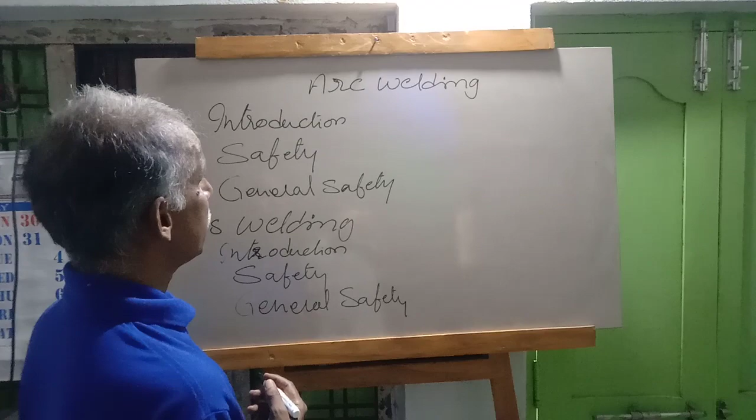In the previous class, we were learning about rivet joints. Rivet joint is a permanent fastener, and arc welding also is a permanent fastener.

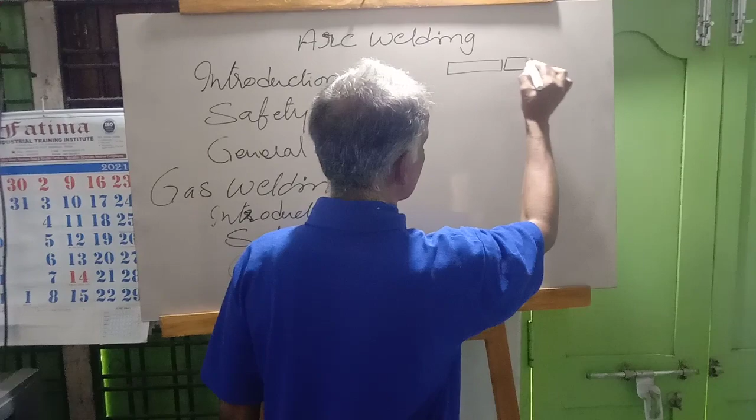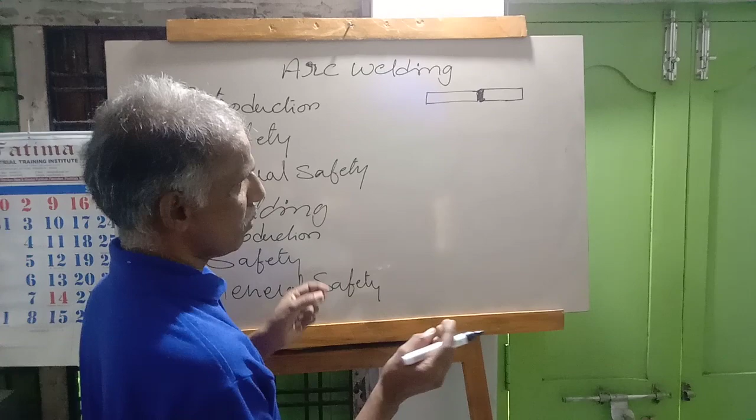Arc welding is a permanent fastener which will join two metal strips by welding, which will melt the two edges of the metal, and the parent metal will fill in these gaps. So to join two or more different parts, different flats, or any iron metal together is called welding. It is a permanent fastener.

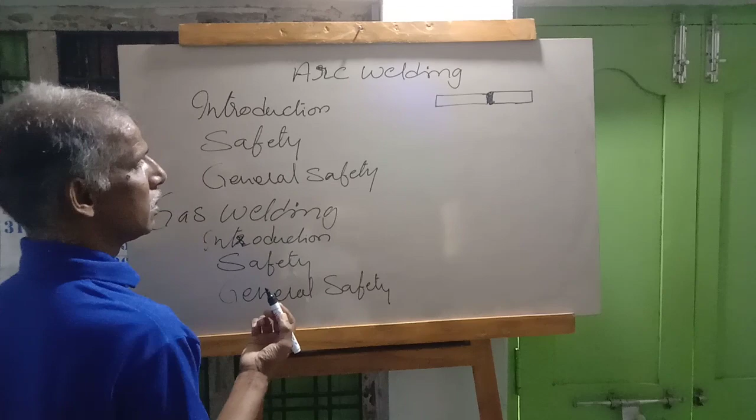Arc welding can be done on metals like mild steel, stainless steel, and cast iron. There are different methods we use for welding to join two different parts. That is the introduction of arc welding.

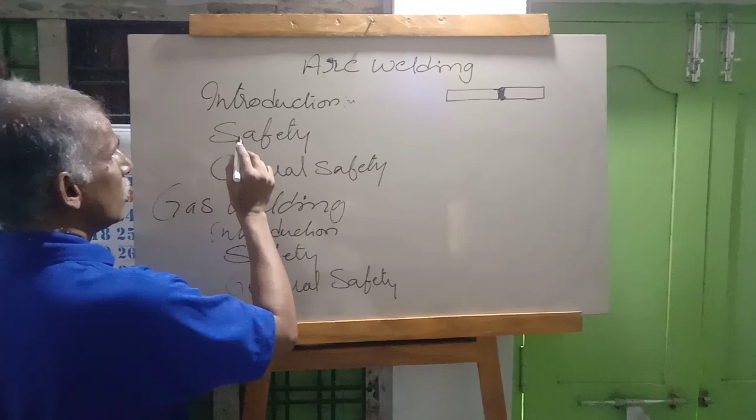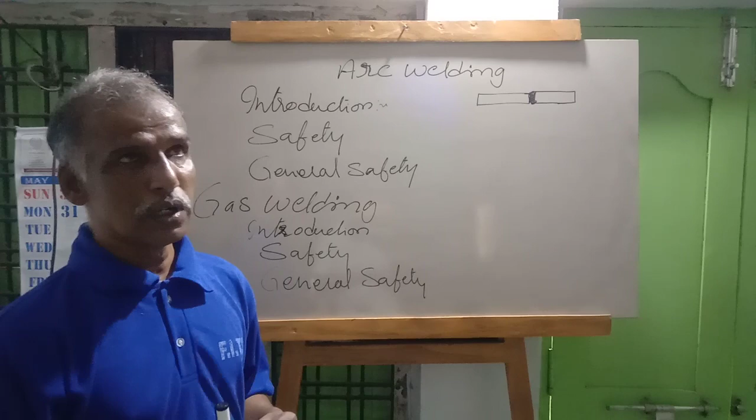When doing arc welding, we have to follow some safety precautions, because the arc produced by the electrode is dangerous to our eyes, as it emits ultraviolet rays. These ultraviolet rays enter into our eyes and will damage your retina.

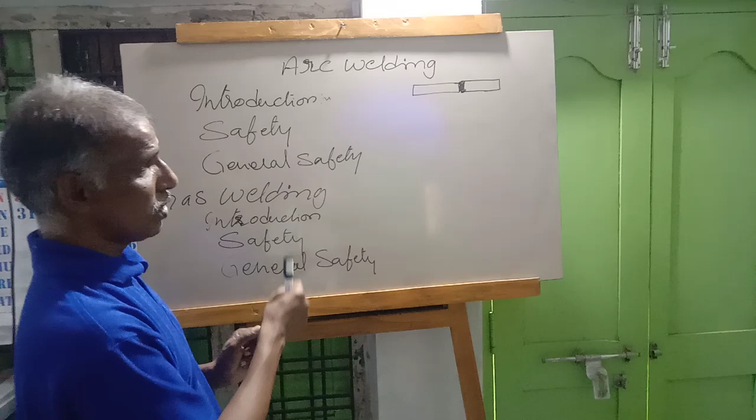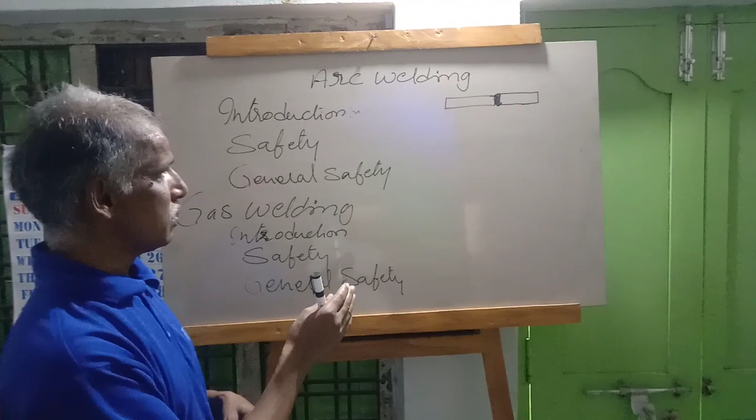So to not allow the ultraviolet rays to enter the eyes directly, while at the same time we need to see where the welding is being done, the welding has to be done perfectly in a systematic way. We definitely have to see, but at the same time the light should not pass to your eyes. So between the ultraviolet rays and our eyes, we use filter glasses which avoid the ultraviolet rays falling on your retina directly.

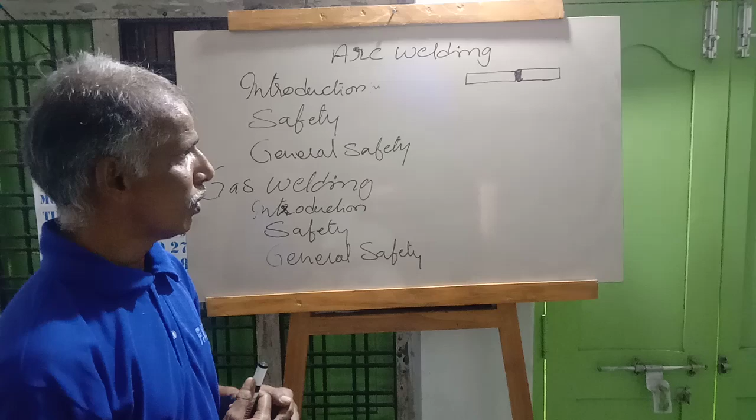This is the first safety precaution we have to follow when we are doing arc welding.

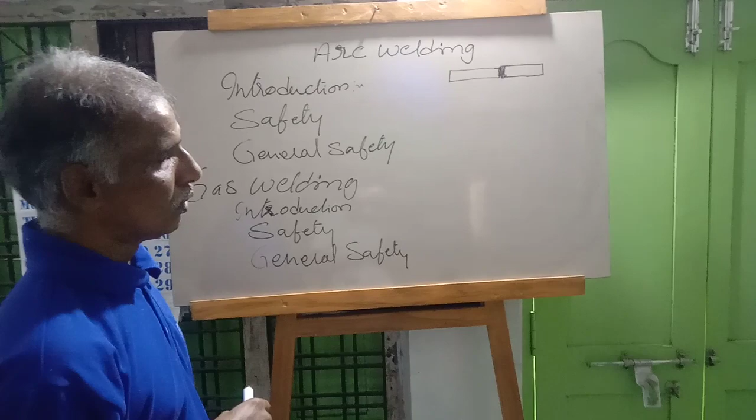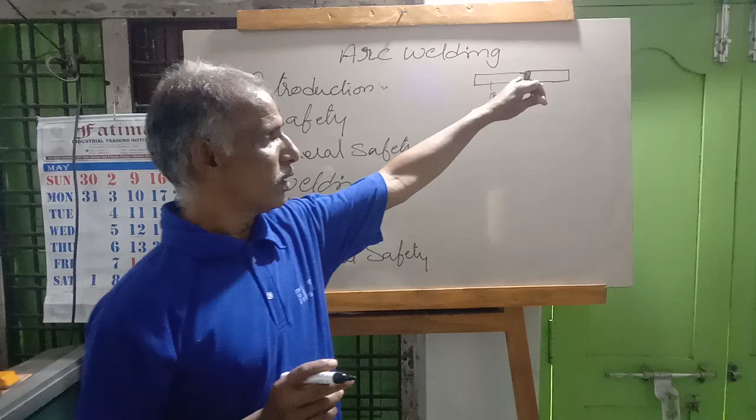Now next, when arc welding is done with the electrode, the place where we are welding, the metal will melt. Generally iron metal melts at 1800 degrees centigrade, but when this iron is melting where we are doing welding, it will have a higher temperature, more than 2400 to 3000 degrees centigrade. When this metal is melting, the metal will oxidize.

At the same time, when we are doing welding, the oxidized metal has to be removed to get good, perfect welding.

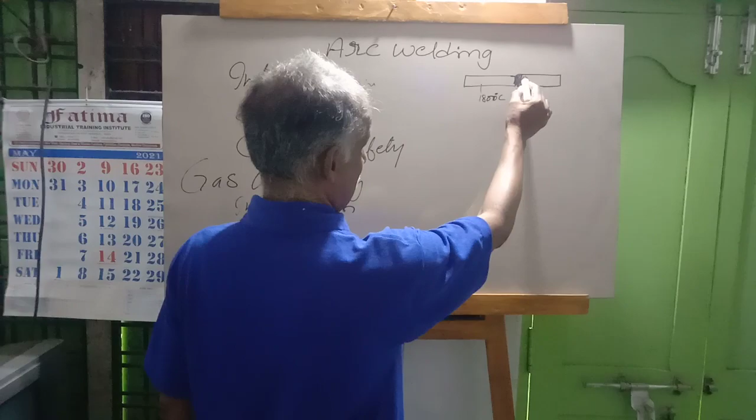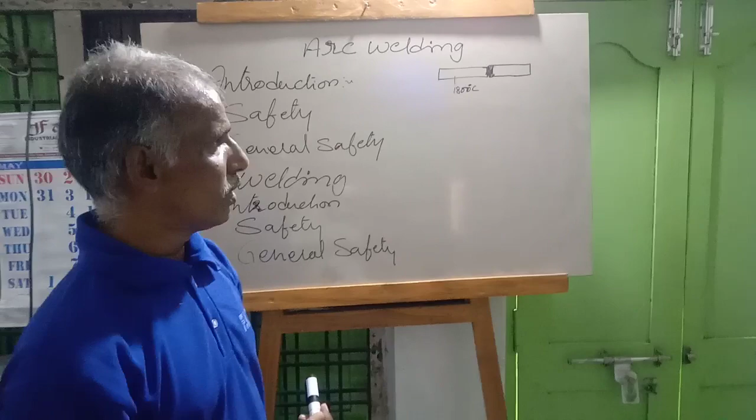When we are doing welding, the electrode has a chemical coating on the wire, and this coating melts along with the welding when it is in the molten state. This chemical will produce more temperature, increasing the heat to melt the metal.

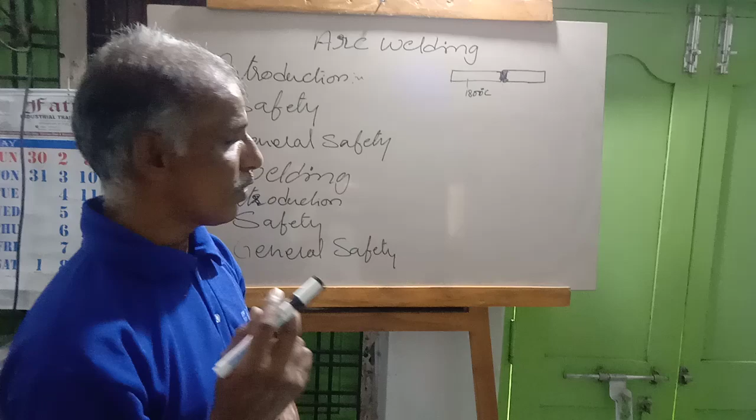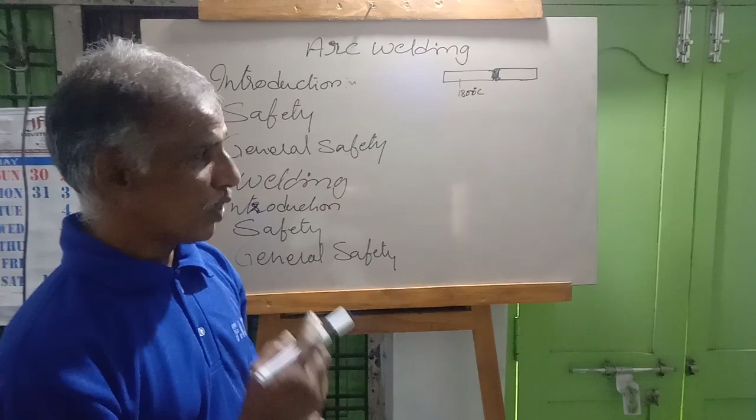At the same time, the chemical burned by this metal melting point produces fumes, and these are hazardous fumes that will affect your eyes. Also, the oxidized metal will expand into the atmosphere, and when you are breathing, it will affect your body.

So the first main safety precaution is that you have to use filter glasses.

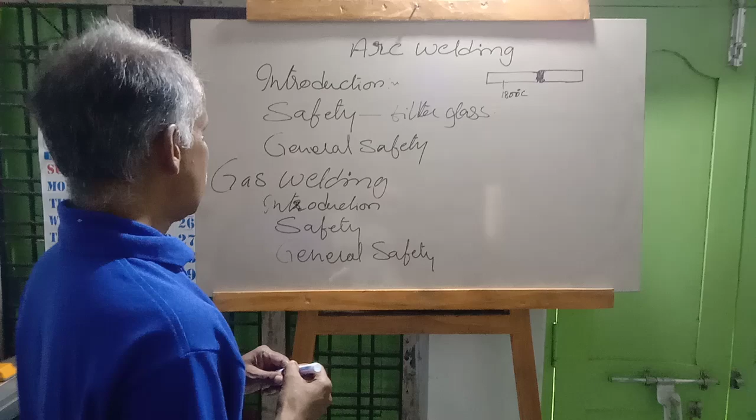Now for general safety when doing arc welding, when you are using the welding machine, the connection from the board to the welding machine should be a perfect connection without any leakage from the wire.

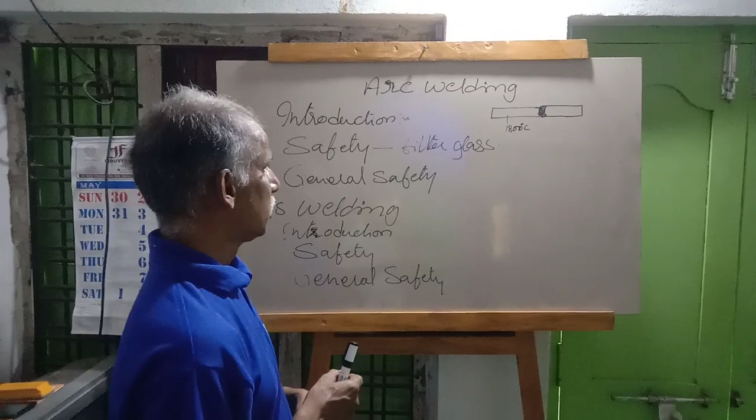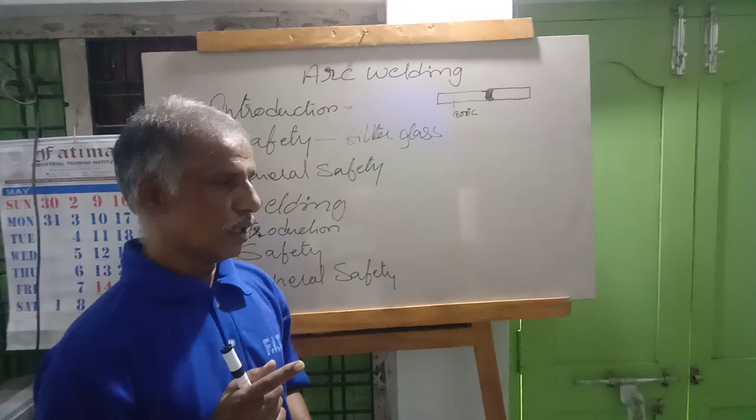Next, see that the electrode wire, holder wire, and earth wire are in good condition without any naked wire in the middle.

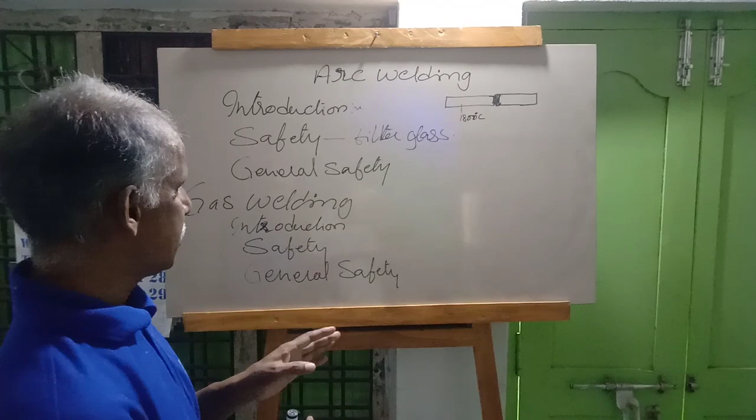Now, when we are doing arc welding, we have to follow some general safety precautions also. These are not just for your personal safety, but for others too, you have to follow the general safety precautions.

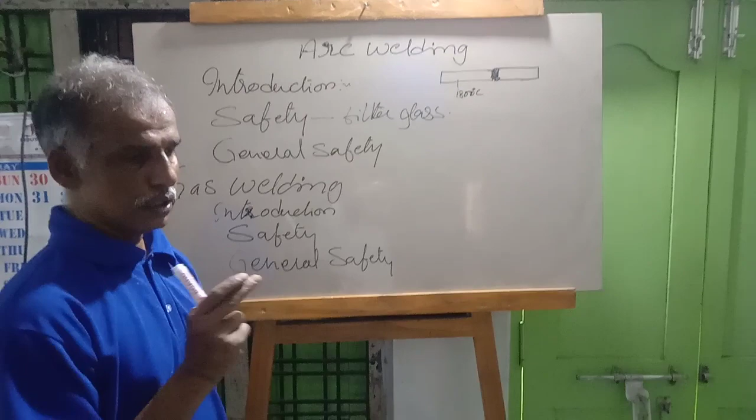First, when you enter the workshop, see that the ground floor where you are working is clean and tidy, without any oil patches. Flammable things should also not be in the workshop, such as cotton waste, timber, grease, oily substances, lubricants, and the like.

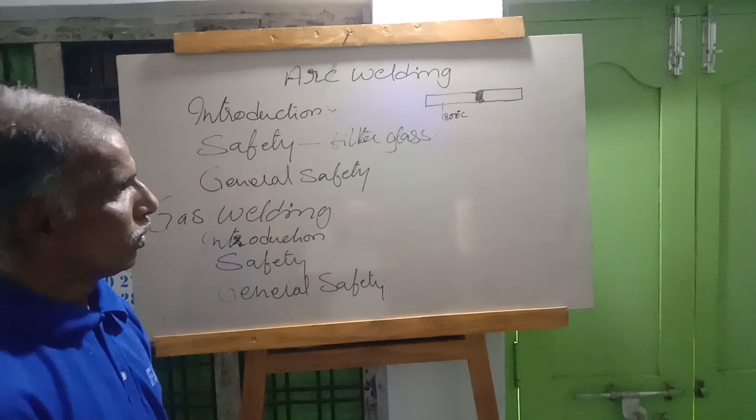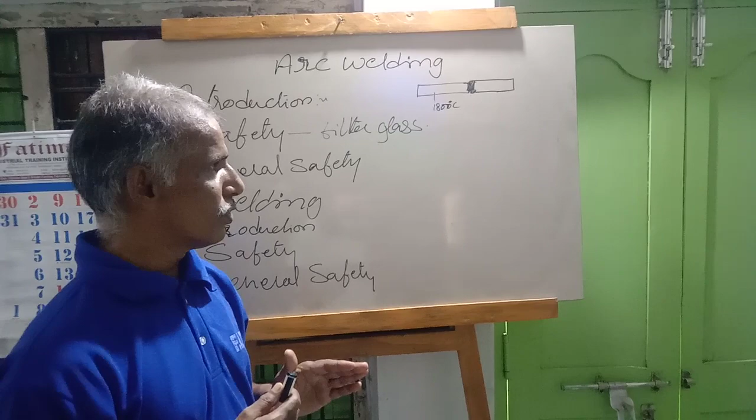Because when we do arc welding, the arc directly produces a flame. This flame may expand if flammable material is there, and it will cause an accident. So keep all flammable things away from the arc welding equipment, meaning the machine.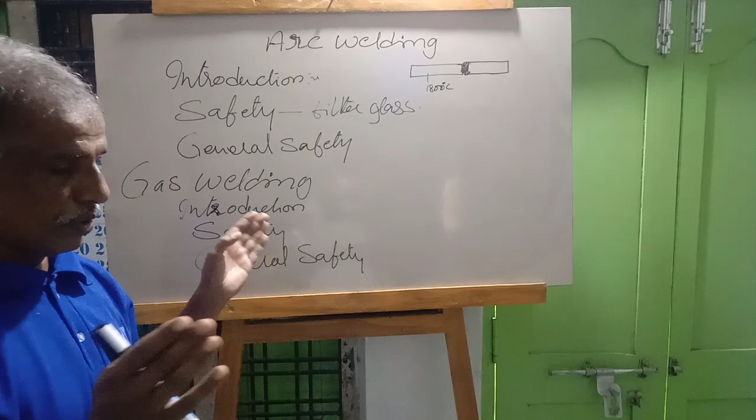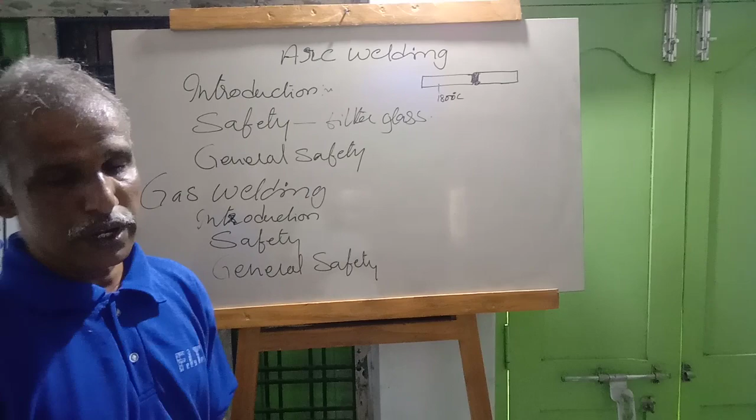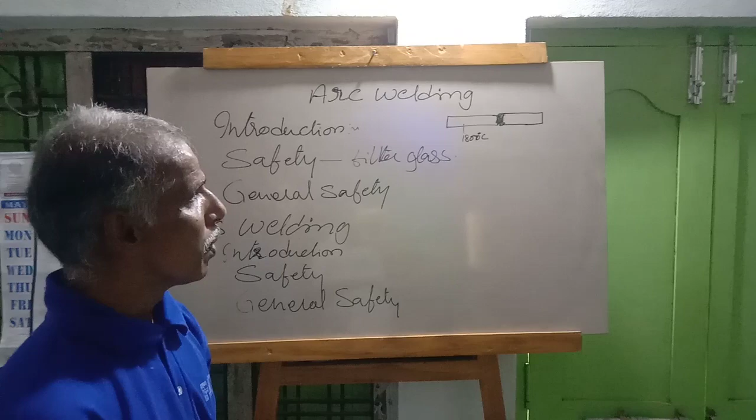And for other safety, you make a booth, generally enclosed by four walls, so as not to expose other persons' eyes to ultraviolet rays. In the workshop, nearby people also working need protection, so on three sides we put screens that are translucent, meaning we can see from the other side but cannot see clearly inside, not completely transparent. This avoids ultraviolet rays attacking other people's eyes.

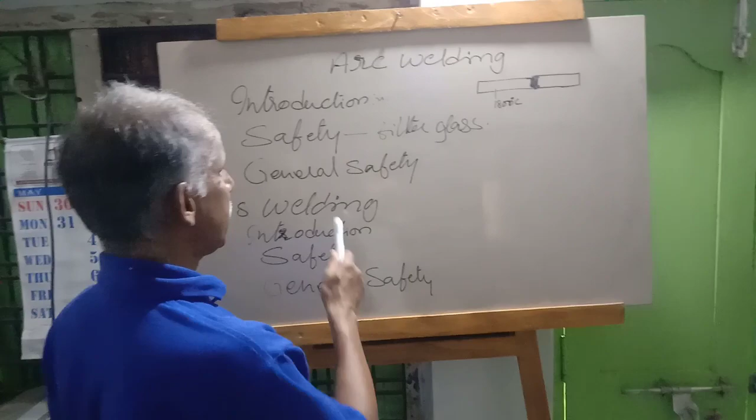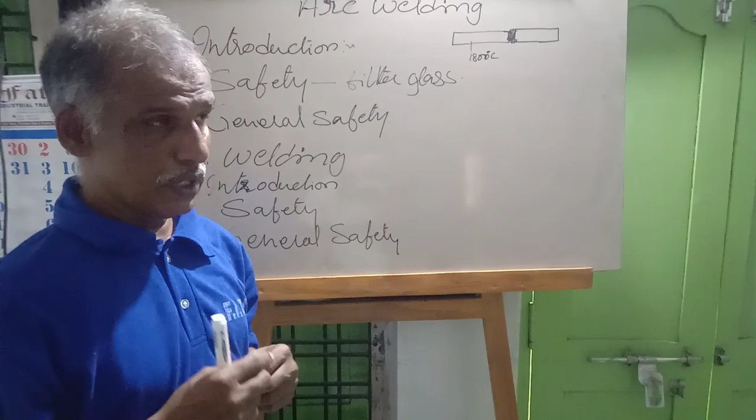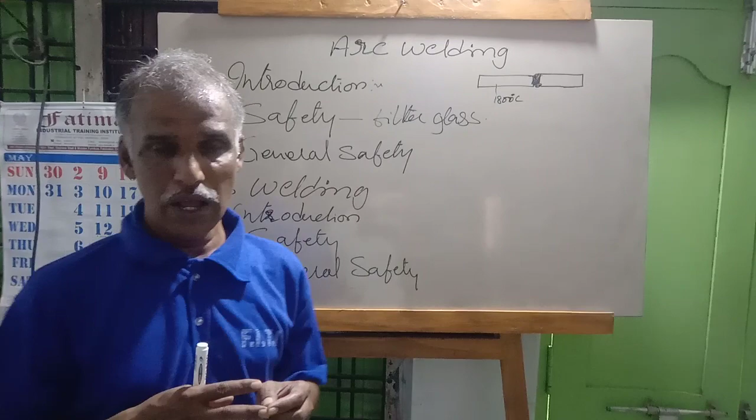Now what do we do? In general safety precautions, you have to wear proper clothing. Don't wear synthetic dress, wear cotton dress, and it should be wrapped with a leather apron. Use asbestos gloves for the hands. When working with welding material, the welding plates and other material become hot.

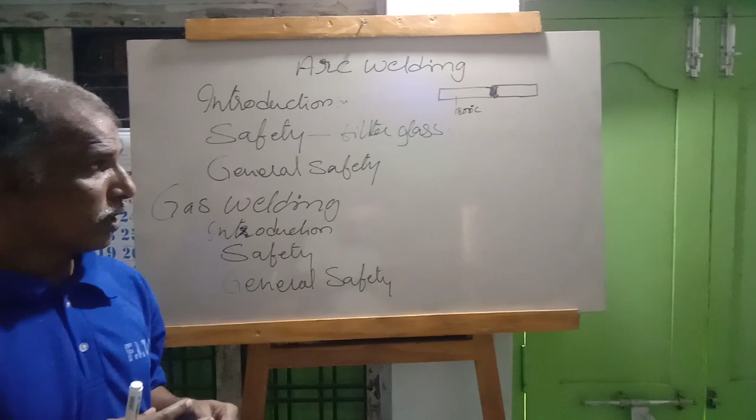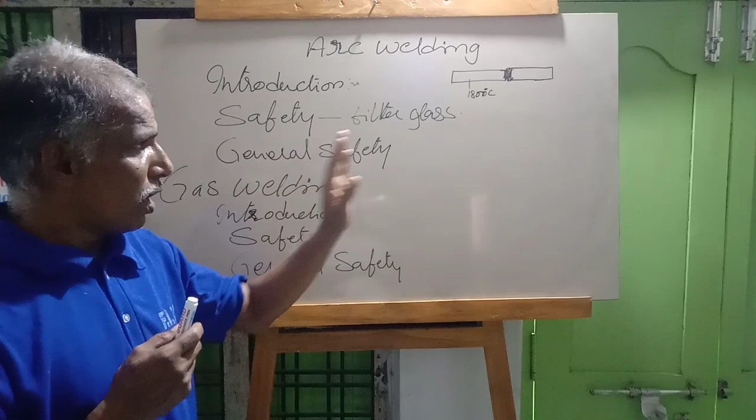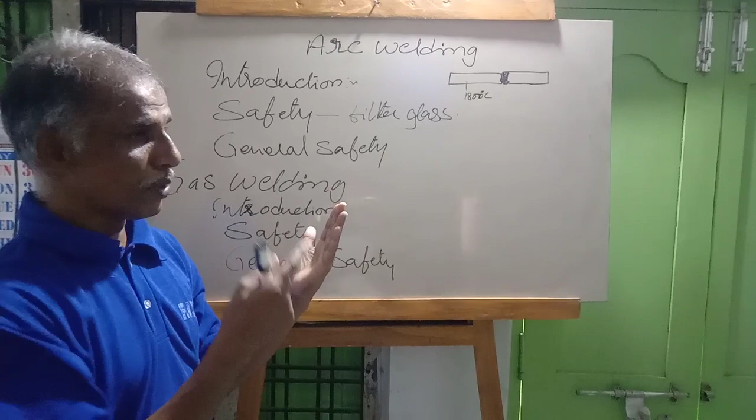At the same time when you wear them, only when the arc is produced will the filter glasses work. This is called photo gray type glass - when the arc falls on the glass, it becomes dark. When the arc is not produced while welding, the glass becomes transparent, like photo gray. It turns black color.

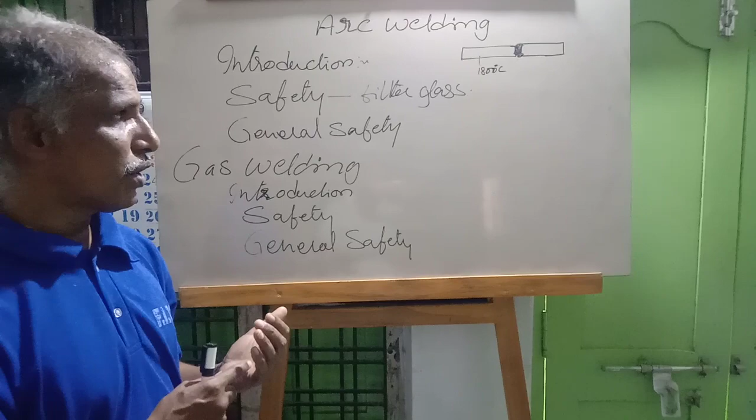Wear goggles, wear good clothing with apron, wear shoes - protective shoes which are used in industries. The shoes should have a protective sole and protection for your toes.

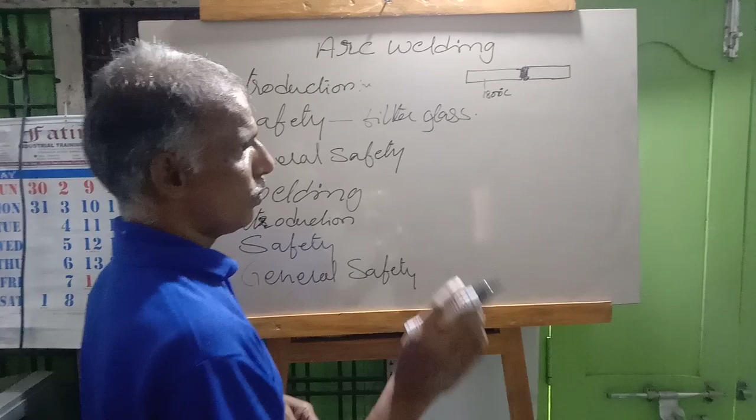After doing the work, when the workpiece is kept aside, you write on it or keep a board where it says don't touch, hot. The material is hot, don't touch - you have to keep the board, or write 'hot' on the workpiece since welding was just done, so people will not touch it.

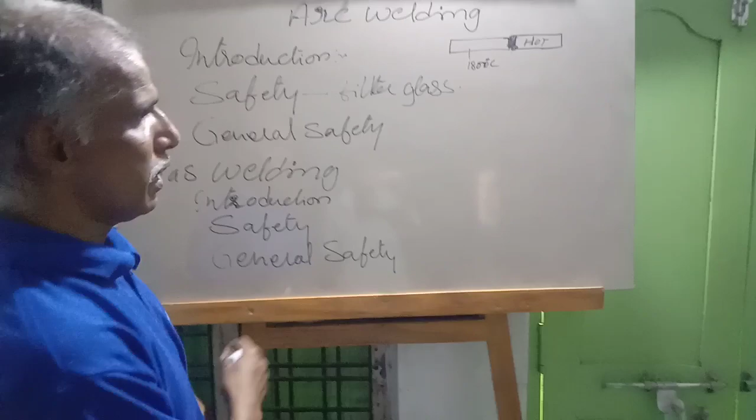These are all the safety precautions. Use a 'hot don't touch' board, or directly write with chalk on the workpiece. These are all the safety precautions you have to follow.

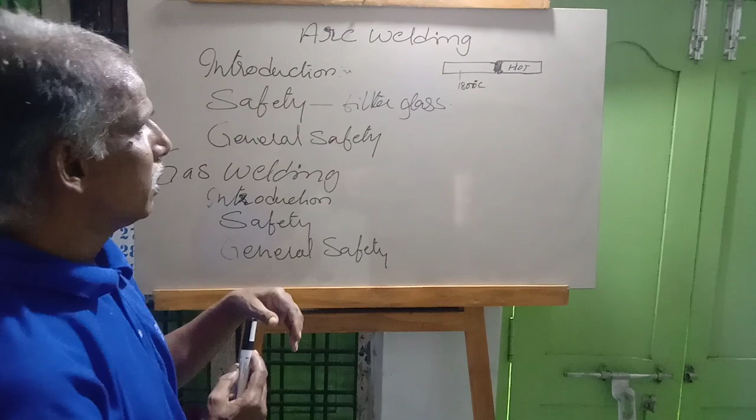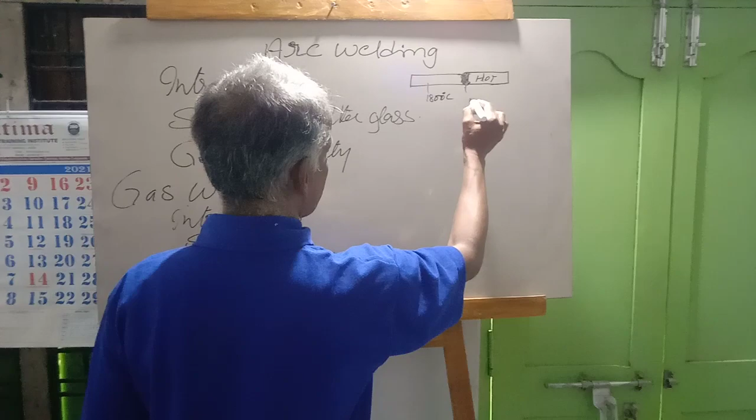Other than general safety precautions, the same applies in gas welding as in arc welding - we have to follow safety precautions there too. This is arc welding, where we join two metals by melting the edges with the parent metal, using an electrode. When joining these two edges, the temperature produced is 1800 degrees and above. So after completing the work, you have to write 'hot' or keep it marked under a hot sign.

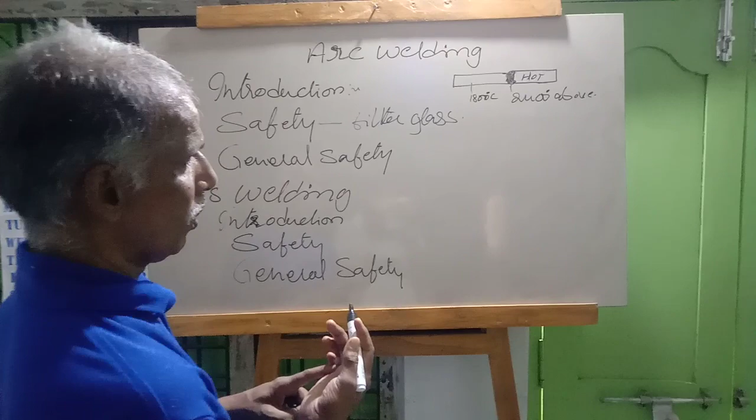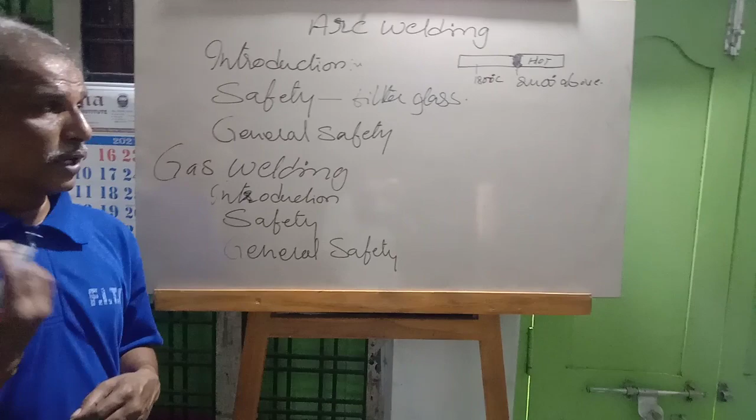Safety precautions while doing welding: wear filter glasses, wear apron, wear mask - sometimes you have to wear a mask for hazard fumes. When breathing, these chemical hazard fumes can enter your breathing, and when inhaling and exhaling, the hazard spreads. Sometimes we have to use exhausting type equipment so hazardous gases are exhausted by a fan.

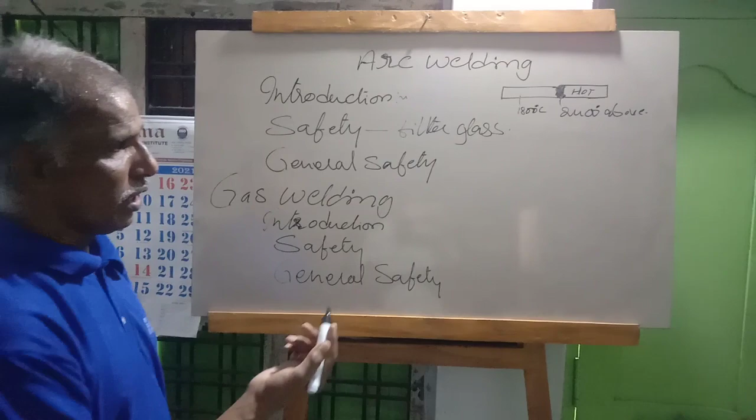General safety: don't allow others to see the arc welding directly. You have to work in a booth where screens are put up, and don't keep any flammable things near the welding machine. These are all the safety measures we have to observe in arc welding.

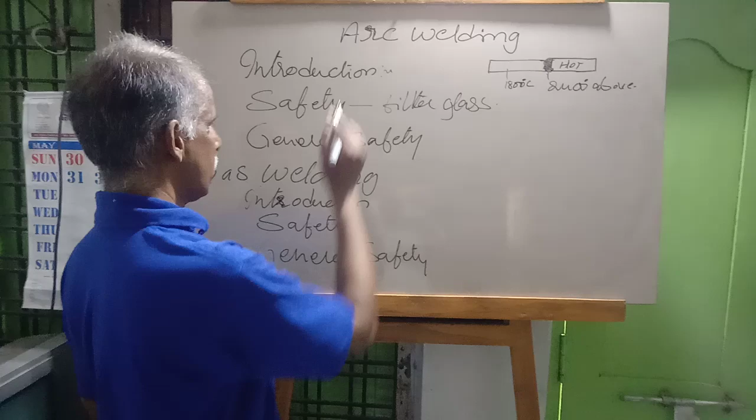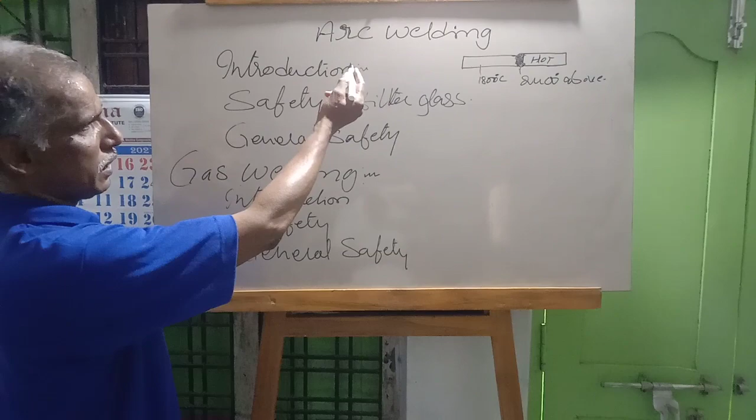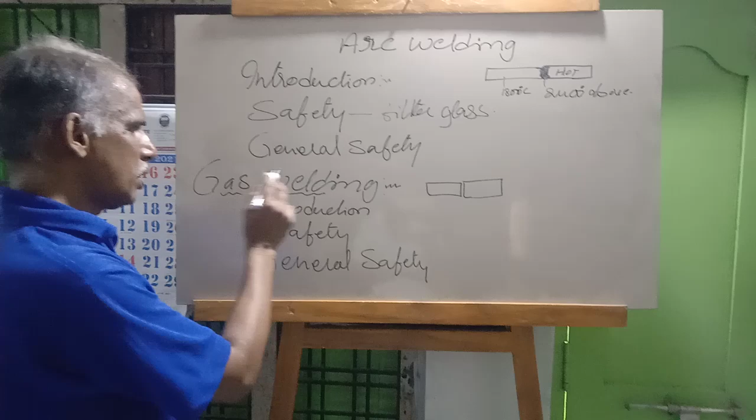Now we will move to gas welding. This arc welding machine is made using electricity. Whereas in gas welding, we use gas to weld two different parts, the same way, by melting. Here, to do gas welding in the same way, we use the parent metal and fill it up. The temperature produced here is nearly 3200 degrees centigrade.

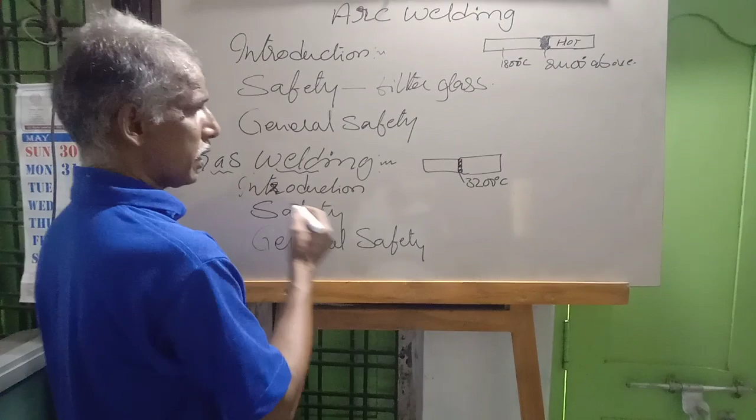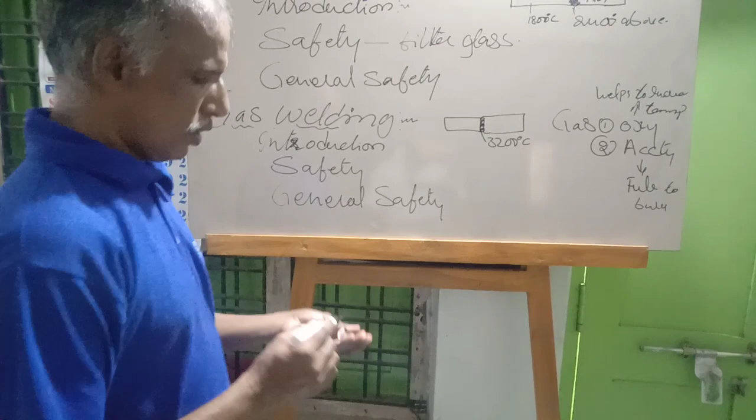What we are using is oxygen. Second one is acetylene. We are using two gases, oxyacetylene. Acetylene is the fuel to burn. Oxygen helps to increase the temperature. These are the two gases we use in gas welding: one is oxygen gas, second is acetylene gas.

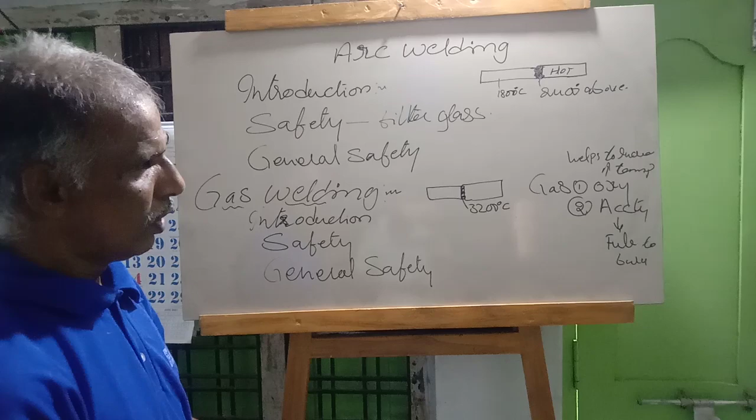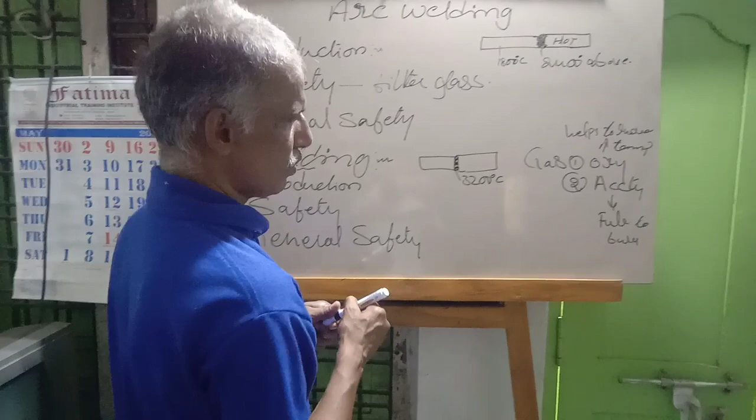This oxyacetylene gas, when you are using it, these gases are filled in iron bottles, meaning containers, with heavy pressure, 6 kgs per centimeter cube. 1 cubic centimeter will have nearly 6 kgs pressure in it.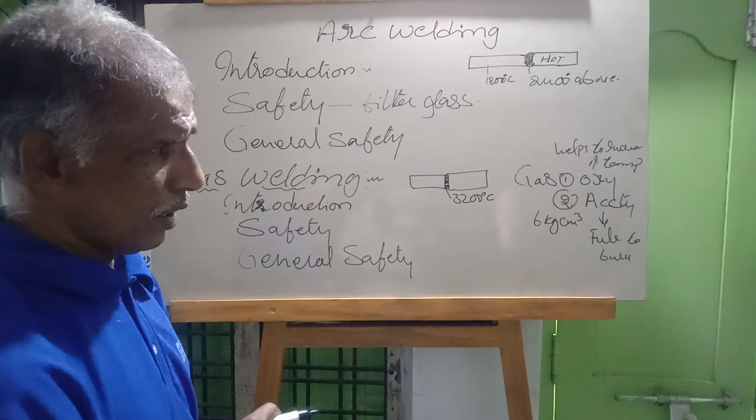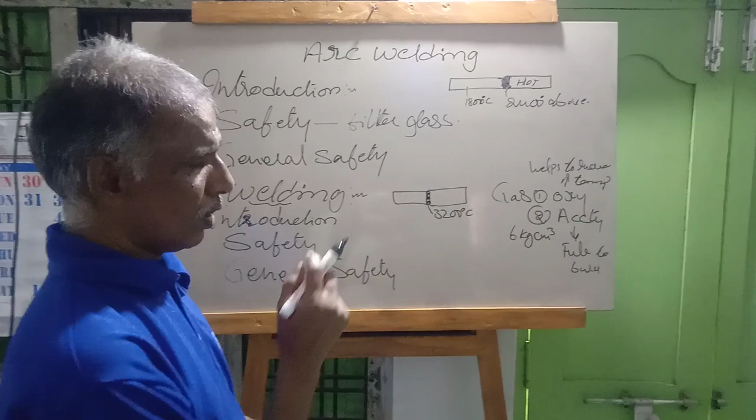So when you are using this oxyacetylene gas, you have to use it very carefully, not mishandle it. And when using this oxyacetylene gas to take it to the welding, you have to work systematically and sensitively to open the gas.

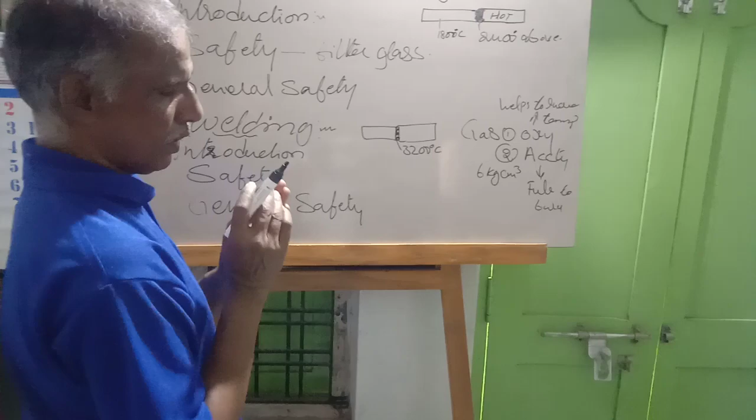Now in gas welding, when you light the torch, for welding we use one torch. In this torch, the oxyacetylene gas, both will connect with two hose pipes. This will allow the gas to enter into the torch, where in the middle section the oxygen and acetylene gas will get mixed.

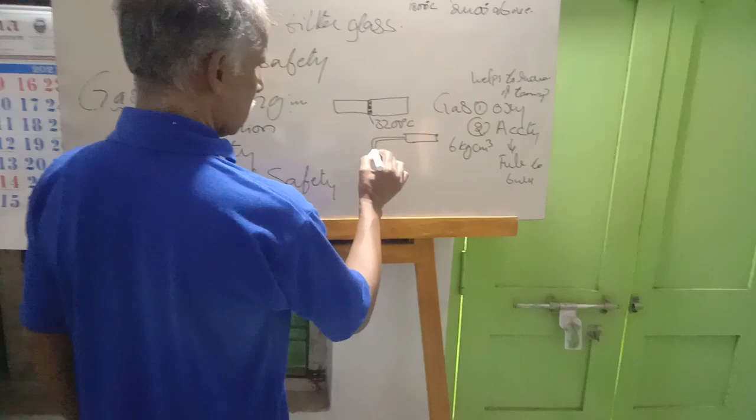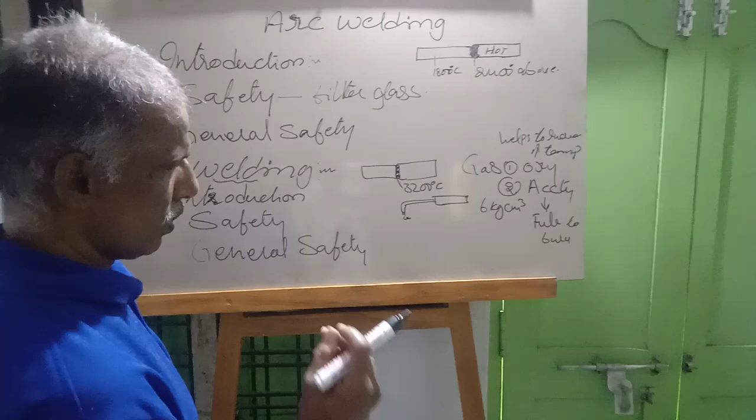This oxy and acetylene gas should be mixed, and through the nozzle it will come out. Here we will light the gas with the help of a lighter, the same kind used in the kitchen to light the stove. The same lighting torch will be used to light this one.

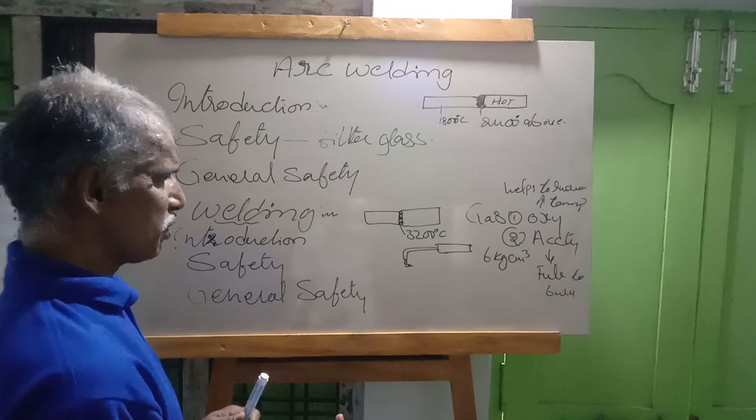So this is the introduction of oxyacetylene gas welding. A safety precaution, same as followed in arc welding: don't keep any flammable things nearby, because there is direct flame here. Directly flame it is there, so it will cause a fire accident.

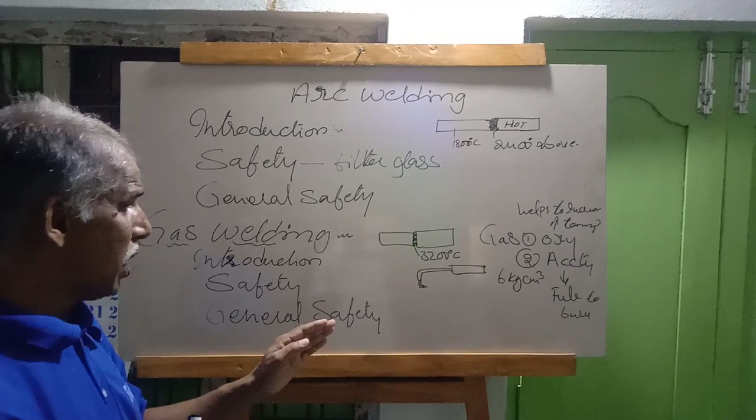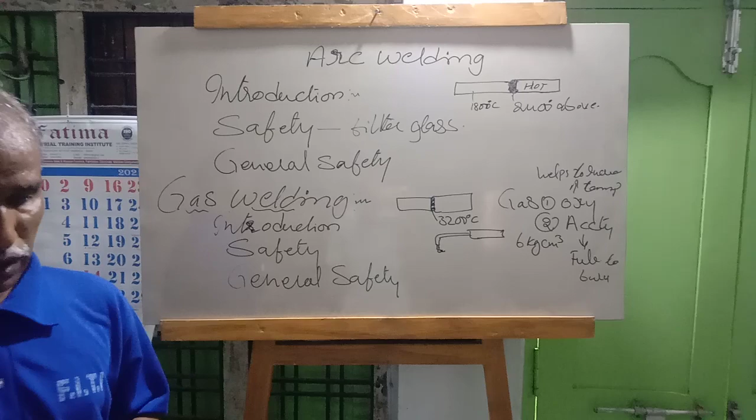Because we are working with fire directly in arc welding or gas welding, it will produce flames. So for safety, if any accident takes place, to make it stop we have to use fire extinguisher, sand buckets. All these things you learned at the start of the fitting section: safety precautions, fire safety, fire accidents, and all.

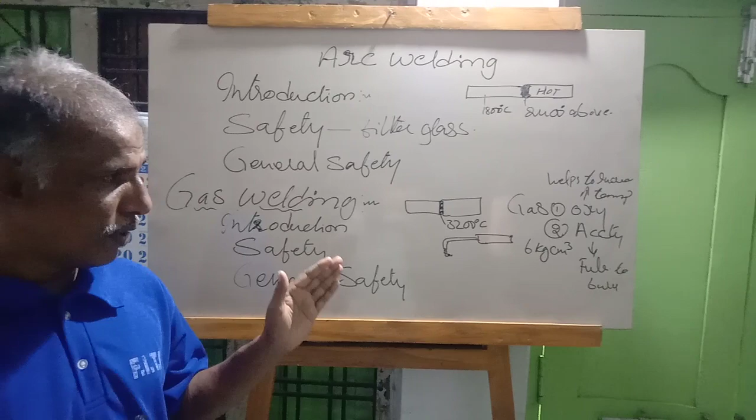To avoid these fire accidents, since we are working with fire, when an unexpected fire accident takes place, you have to stop it. We will use fire extinguishers, and for different types of fire accidents, different methods have to be used to stop them.

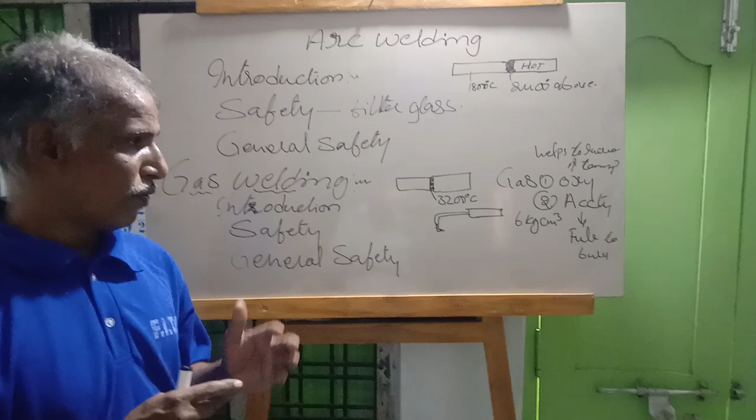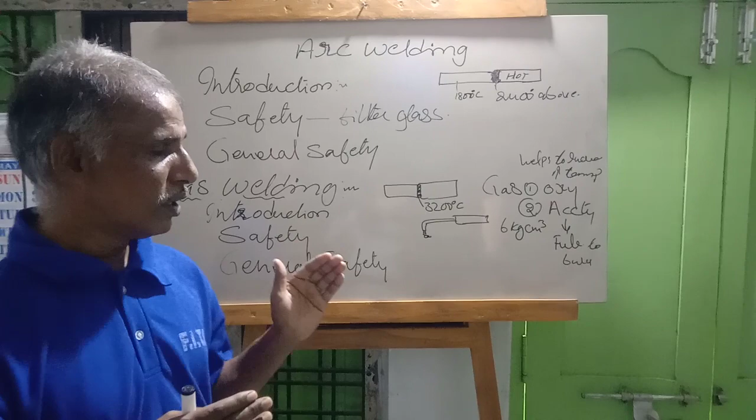For example, if an electrical loose contact of a naked wire causes a fire accident, if you put water directly on that, you will get an accident, because the current will pass through the water and you. So for different types of fire accidents, we have to use different fire extinguishers and different methods to stop them.

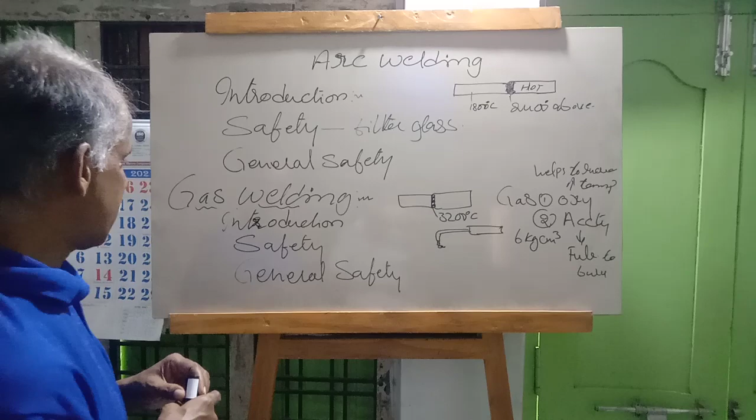All these things we learned at the beginning of this fitter first year trade. These are all the general safety measures: you wear the apron, wear the goggles here, and this is more dangerous than arc welding.

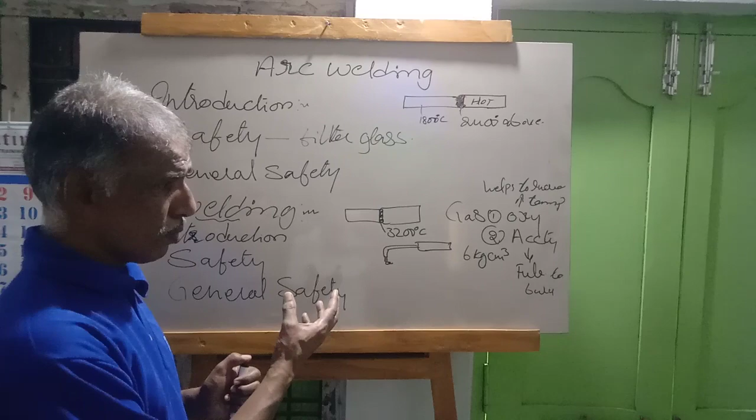Because 3200 degrees centigrade is produced here, and we are sitting very nearby doing the welding, this temperature will affect your eyes, skin and face. So it's better to have a mask and goggles and use them. This is more dangerous than arc welding. If you misuse and mix the oxy or acetylene gas in the wrong ratio, it will also cause a fire accident, so be careful while doing gas welding.